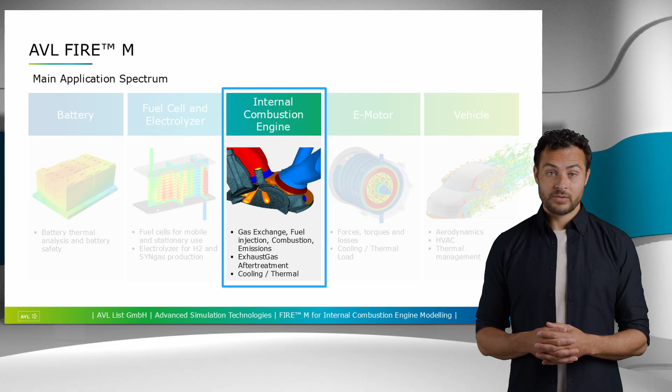Our internal combustion engine simulation capabilities help developing well-functioning and robust solutions for gas exchange, fuel provision, combustion and emission, exhaust gas aftertreatment and engine thermal load to meet customer expectations and legal standards. Let's look at all these points a little bit more in detail.

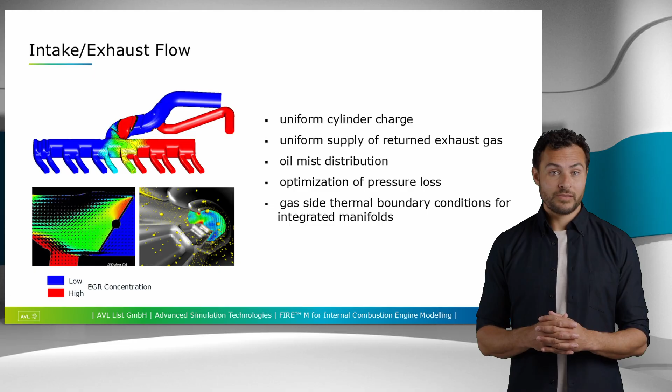First, let's look at intake and exhaust systems. The intake, but also the exhaust system, plays an important role when it comes to engine performance. Their design impacts gas dynamics and respectively the amount of charge provided to the individual cylinders. If an engine is operated with returned exhaust gas, the intake manifold design additionally needs to ensure proper mixing of the exhaust gas and the fresh air.

To help developing manifolds, FIRE M offers multiple options. Depending on which is selected, results are provided faster or more accurate. This correlates to the needs during the different stages of the development process. While, for example, quick analysis of multiple designs is needed during the concept phase, accuracy is more important than speed in the detail design phase.

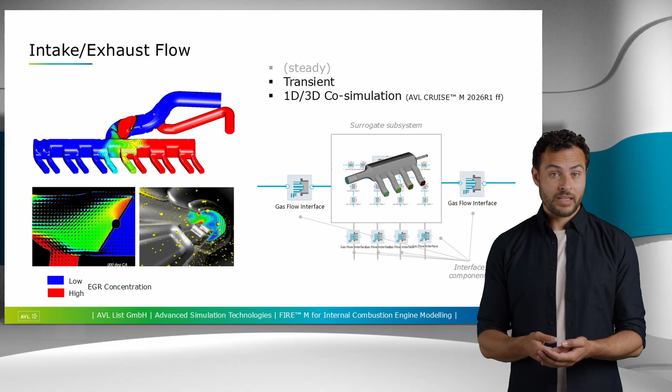With the release of Cruise M and FIRE M version 2026 R1, also a 1D to 3D co-simulation option for intake and exhaust manifolds is offered. It ensures always correct boundary conditions for the 3D simulation and minimizes the calibration effort needed for the 1D model.

Intake and exhaust ports are typically not seen as part of the intake or exhaust system, but nevertheless, their design is of decisive importance when it comes to engine performance and efficiency. This is why developing and optimizing them is a standard task in the engine development process. And simulation is widely used to achieve the targeted performance indicators, which are discharge rate and swirl or tumble number.

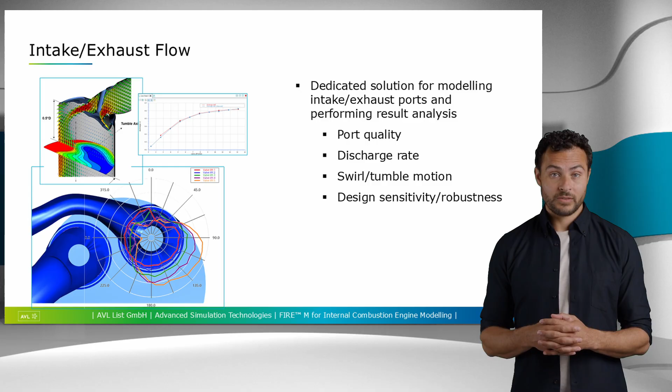To perform these simulations, FIRE M users utilize the so-called port workflow, which enables them to set up model generation, execution and analysis of a complete series of cases, each representing a different valve lift, within minutes. And above all, the modeling approach underlying the FIRE M workflow accurately reflects the environment and procedure used in hardware-based tests on a flow test bench. Therefore, simulation results and measured data are directly comparable.

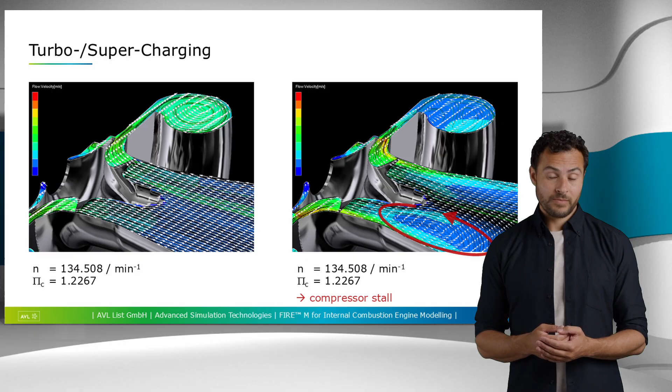Most of today's internal combustion engines are turbocharged. Using FIRE M, our clients investigate how the flow in the compressor develops at different operating points. This helps them to ensure the component's performance and to avoid stall. Also, FIRE M offers all that is needed to efficiently and accurately analyze the thermal load of the compressor.

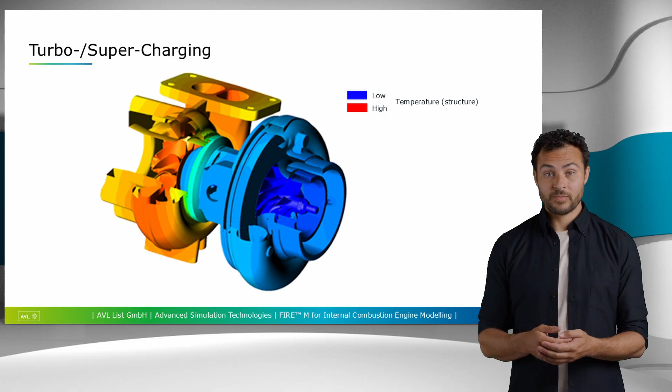Let's now look at in-cylinder flow modeling. Simulating combustion. More precisely, gas exchange, fuel provision, air-fuel mixture, ignition, combustion and emissions, is the DNA of FIRE M. The software spray, wall film and combustion modeling capabilities are well acknowledged by leading automotive companies and their suppliers. They enable our clients to determine reliably the impact of design and operating parameter variations on performance, efficiency and emissions. The basis for this excellence was formed in intensive research activities with partners in academia and industry.

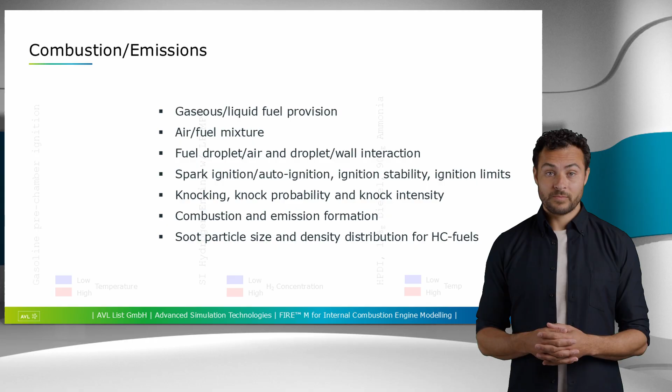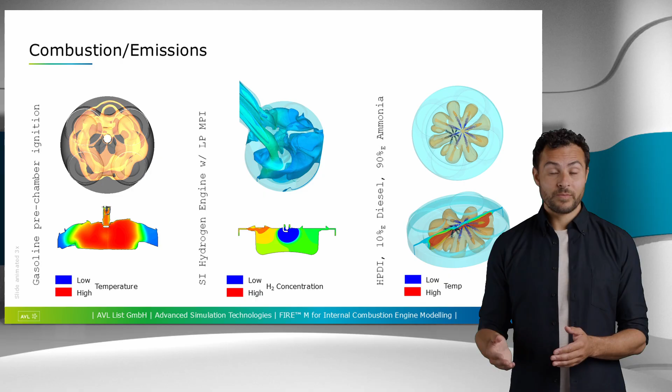For example, engines running on fossil resource-based fuels, such as diesel or gasoline, hydrogen, dual-fuel applications like diesel ammonia, as shown here. With FIRE M you have chosen the right tool to develop them all. Most modern combustion engines feature fuel injection systems. Simulating all related phenomena is a challenge for many CFD codes. But not so for FIRE M.

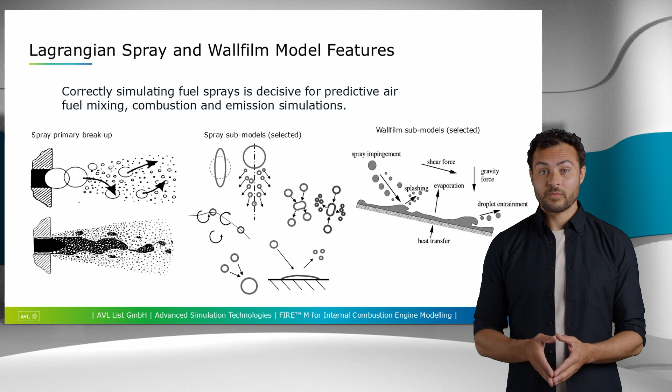FIRE M users can benefit from in-depth modeling of all physics related to fuel injection, such as fuel primary and secondary breakup, droplet turbulent dispersion, distortion and drag, collision and coalescence, wall interaction, wall film formation, as well as heat transfer between gas and liquid phases and solid walls. This level of detail is of utmost importance in the development of predictive simulation models.

A particularly valuable feature of FIRE M in this context is the so-called nozzle interface modeling capability. It connects the nozzle interior flow simulation and the simulation of the fuel spray in the cylinder by passing the flow conditions in the nozzle orifice's outlet sections when releasing the fuel into the combustion chamber. This enables a precise prediction of the primary fuel breakup, which is a precondition for accurately modeling all subsequent fuel injection-related phenomena.

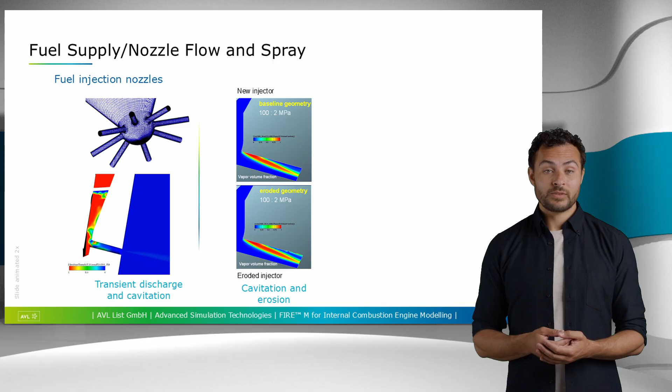But not only this. FIRE M offers the possibility to model cavitation and erosion through cavitation in the spray holes of injection nozzles. In combination with the nozzle interface capability, FIRE M thus can predict how the performance of a fuel injection nozzle changes over lifetime.

The nozzle internal flow simulation also predicts fluid velocity, density, vapor, and liquid volume fraction depending on the given boundary conditions, which are primarily the pressure in the fuel supply line, the pressure in the combustion chamber, and nozzle geometry. If the latter has changed over the injector's lifetime due to cavitation inside the nozzle orifices and erosion accordingly, the conditions in the orifice's outlet sections change.

The resulting difference in the flow pattern causes different fuel sprays in the combustion chamber. For the displayed instance in time, the new injector provides a narrower spray angle and a larger penetration compared to the aged, eroded injector with its wider cone and shorter propagation.

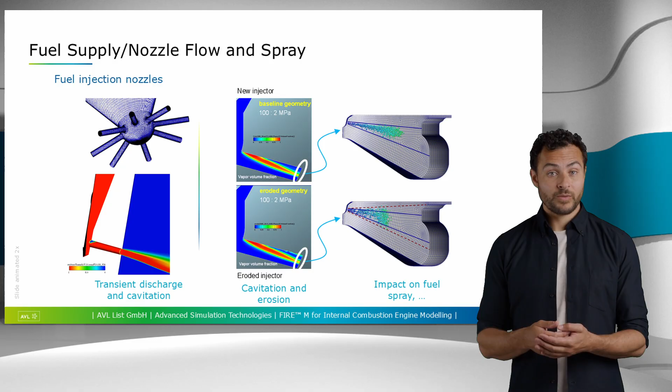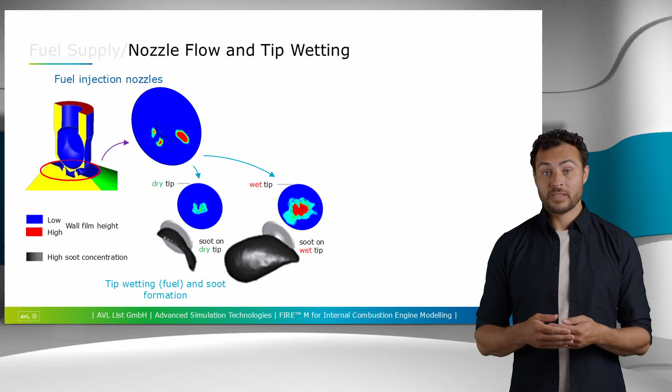If that cannot be accomplished, design your combustion chamber to enable evaporation of deposited fuel before the flame arrives at the tip. The same FIRE M capability is also used to analyze AdBlue nozzle tip wetting. Wetting of AdBlue nozzle tips favors deposit formation and can, in the worst case, lead to malfunction of the SCR aftertreatment component. For both fuel and AdBlue injection nozzles, the amount of tip wetting can be influenced by nozzle design, nozzle protrusion, and air motion in the vicinity of the tip.

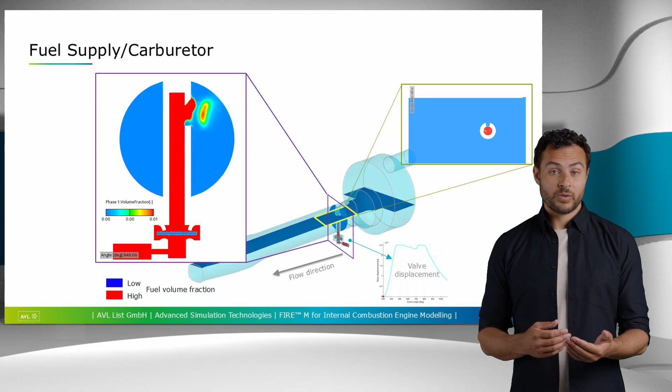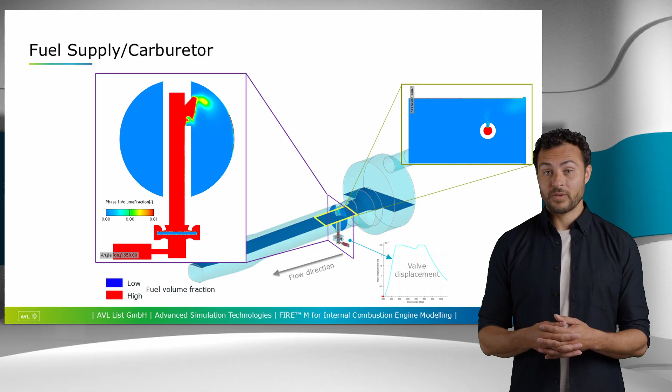Not only injection nozzles, but also the fuel supply through carburetors is simulated using FIRE M. Makers of small engines, such as for chainsaws or mowers, carry out such simulations to determine and optimize air-fuel mixing in all operating modes. The movement of the valve in the supply line is controlled by the pressures on top and beneath the valve. The displacement is calculated online during the simulation, which makes use of the Eulerian multiphase capabilities of FIRE M.

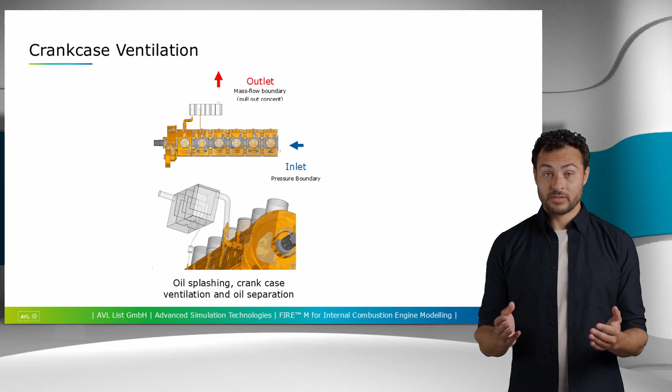The Eulerian multiphase module was also utilized in the simulation, which was carried out to investigate the crankcase ventilation of a hydrogen-powered ICE. The yellow surface represents the oil in the crankcase. The oil is moving due to interaction with the ventilation air, the air motion due to cranktrain movement, and because of the interaction with the cranktrain itself.

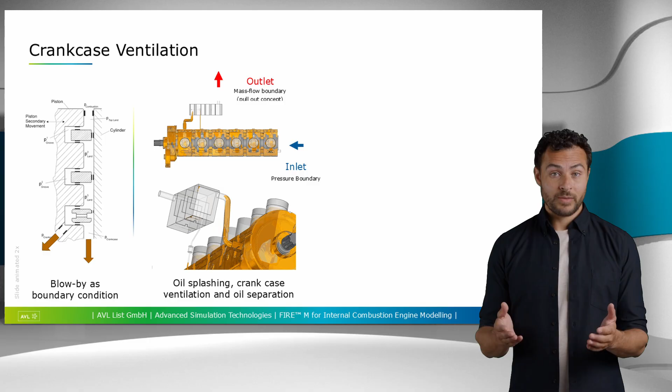The ultimate target of this simulation is to figure out whether and, if so, how much hydrogen is entering the crankcase and where it accumulates. The information about whether and how much is provided by a FIRE M in-cylinder flow simulation that is linked to an Excite piston and rings model. Excite provides the amount of blow-by and FIRE M provides the hydrogen concentration in it.

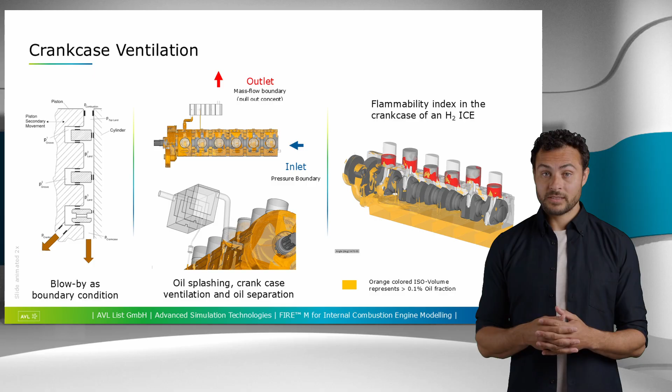With such a simulation we are able to determine the regions with high hydrogen concentration. In the figure on the right, they are indicated in red. In this particular case, the derived flammability index is very low, which tells us that there is no danger.

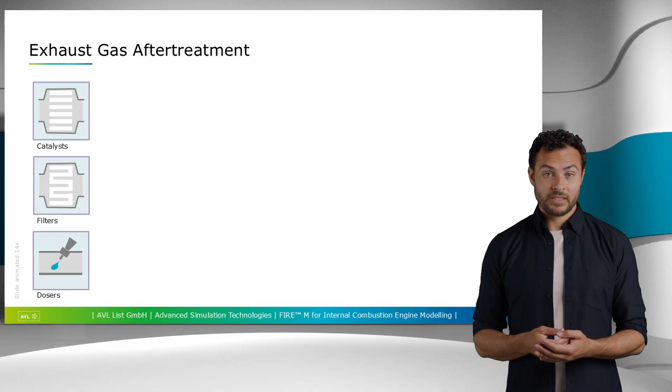A large number of our software clients use our simulation solutions to support the development of exhaust gas aftertreatment components, like catalysts, filters and dosers, and complete systems.

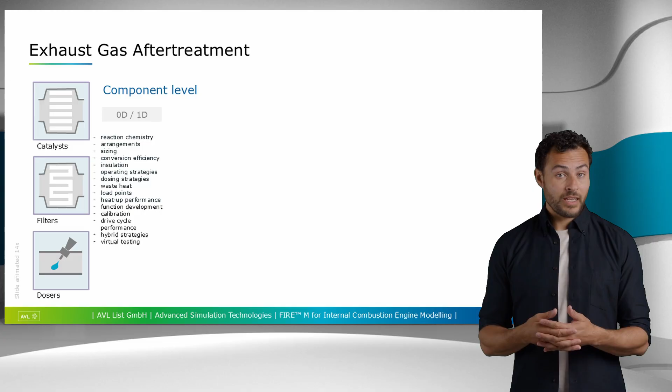Doing so, they typically start their work by performing simulation in 0D or 1D using AVL CRUISE M. This is because CRUISE M models run much faster than FIRE M models, even in real time, and hence enable investigating many cases in very, very short time. Contrary to CRUISE M, FIRE M is used to perform analysis tasks that require exact consideration of geometrical details and their effects.

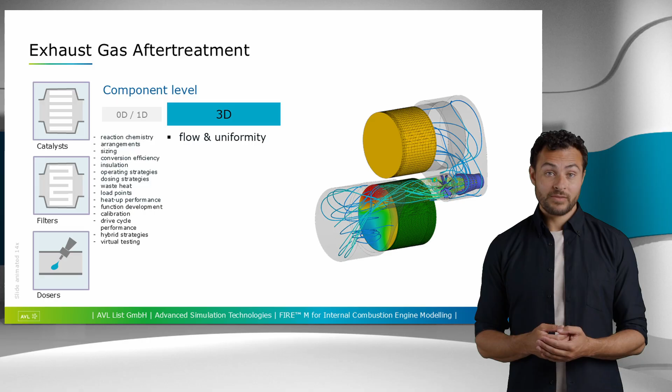For example, determining and optimizing flow or ammonia uniformity in front of a catalyst. These simulations require running a 3D CFD simulation in FIRE M. FIRE M is also strong in modeling the AdBlue injection in front of SCR catalysts.

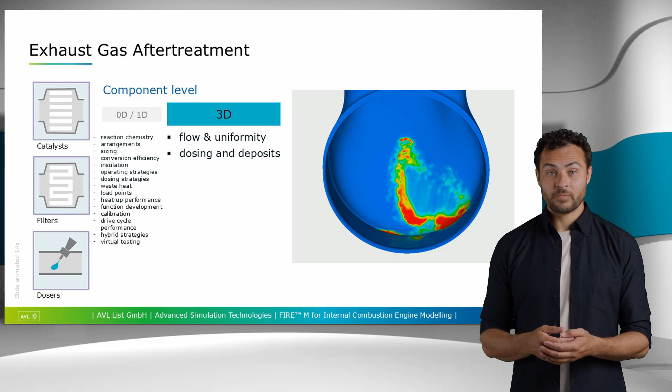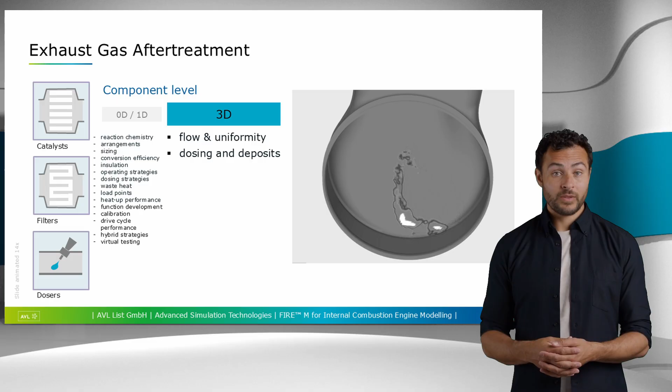Simultaneous to the AdBlue injection, FIRE M computes AdBlue and wall interaction and the potential formation of wall film, which may result in the formation of urea crystals, like biuret, triuret, cyanuric acid, ammelide, ammeline, and melamine. If this is the case, FIRE M will predict this too. Species conversion is simulated in FIRE M, if the impact of the inflow conditions on catalyst heat-up and conversion efficiency shall be analyzed.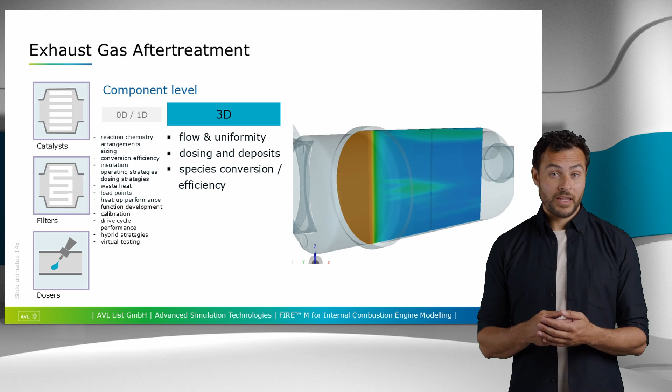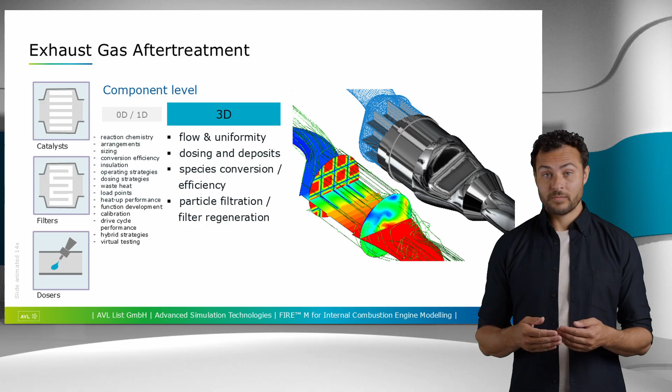FIRE Classic also offers simulating loading and regeneration of diesel and gasoline particulate filters. This capability helps, for example, developing filter regeneration strategies. Filter regeneration simulations are often connected to the thermal load analyses of filter bricks. These simulations can help preventing cracks in the filter structure caused by thermal stress.

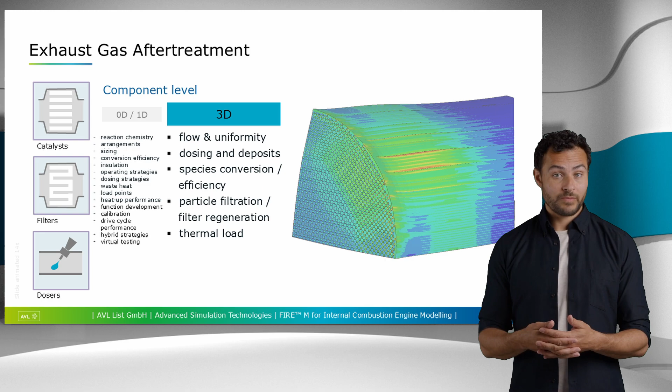I think you've already realized how powerful our exhaust aftertreatment simulation solution is. Still, I'd like to give you a few more information. Exhaust gas aftertreatment simulations are also performed on system level. System simulations are typically performed in 0D or 1D. Means, CRUISE M is the right tool for it. Also, for predicting vehicle test and drive cycle emissions, CRUISE M is the tool of choice.

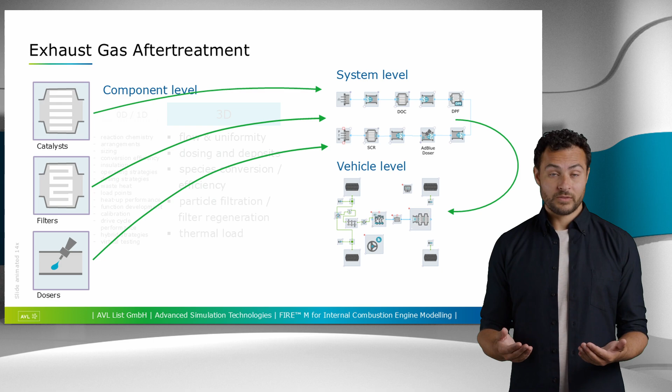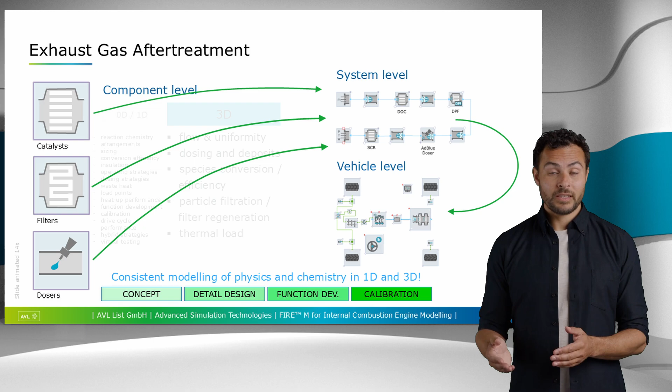Important is, the physical and chemical models applied in CRUISE M for 1D simulations and in FIRE M for 3D simulations are consistent. This is a unique feature of the AVL aftertreatment simulation solution. It allows to perfectly balance modeling speed and level of detail throughout the whole development process of an exhaust gas aftertreatment component or system. Use just the tool that fits best to available inputs and analysis targets. The results are consistent across dimensions in space.

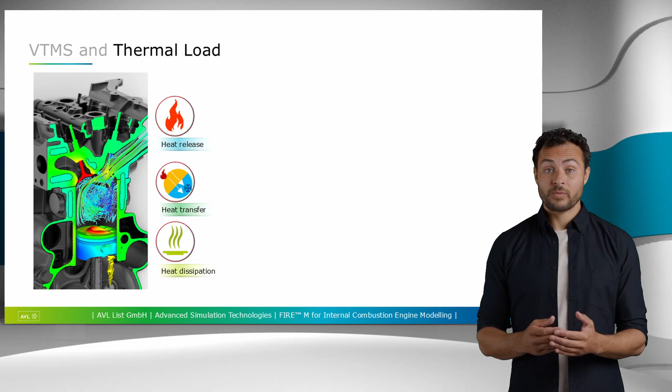The last use case of FIRE M which I like to highlight is engine thermal load analysis. FIRE M's reputation is to a significant extent also built upon its heat transfer modeling capabilities. These are essential to determine the thermal load of combustion engines and their components. Exemplary, we are looking now at the so-called head block compound.

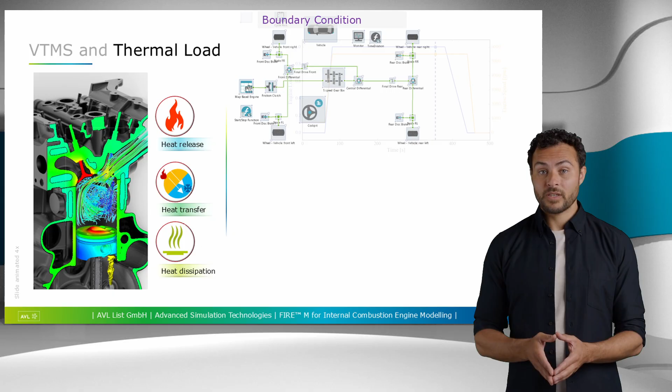Boundary conditions for this analysis task, including coolant mass flow and temperature, are derived from CRUISE M simulations. This is essential especially when simulating transient engine operation or thermoshock tests. Further boundary conditions are obtained from FIRE M combustion simulations, which provide load-dependent heat transfer between in-cylinder gas and structure, and a FIRE M coolant water jacket simulation which delivers the heat transfer between coolant and structure.

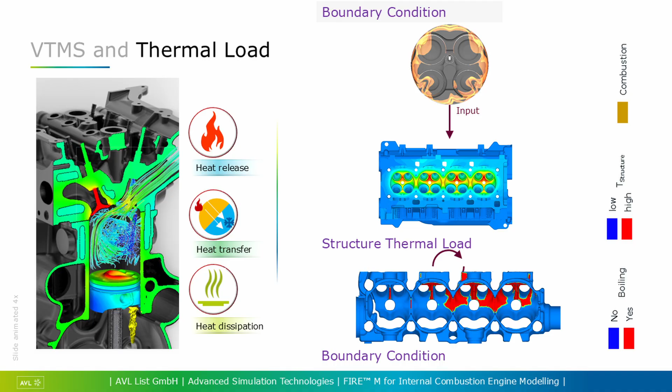The results of the FIRE M simulations allow the calculation of the thermal load on the cylinder head block assembly. The solution is applicable to simulate both steady-state and transient engine operation. Remains for me to add that the just described thermal analysis methodology is applicable to a variety of powertrain components, such as piston, turbocharger, exhaust manifold, and others.

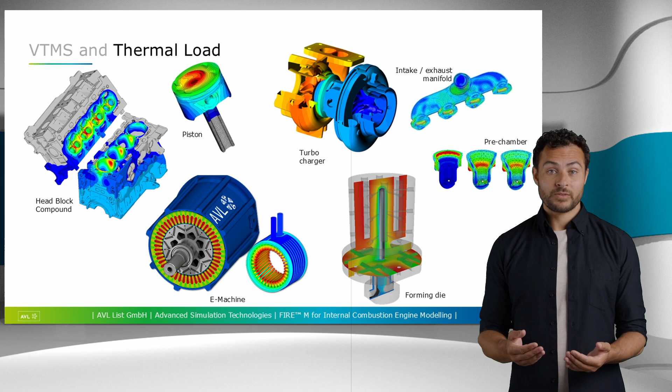If you engage in the development of combustion engines or their components, FIRE M is the right tool for you. Our solution supports you decisively in developing zero-impact emission and CO2-neutral ICE-based powertrains with fast and predictive virtual analysis and optimization of gas exchange, combustion, raw and tailpipe emission and thermal load to meet key performance targets. This is possible due to scalable physical models for balancing speed and performance. All features are accessible through a modern GUI, a powerful scripting environment and dedicated, validated and automated workflows.

And all of this is based on the innovative power of a team that has always been committed to clean mobility and for almost 4 decades to virtualization. And finally, not to forget to mention, we are always with you. Not only virtually. A worldwide network of real AVL simulation experts is available to support you in doing your day-to-day business effectively, efficiently, timely, and close to you.